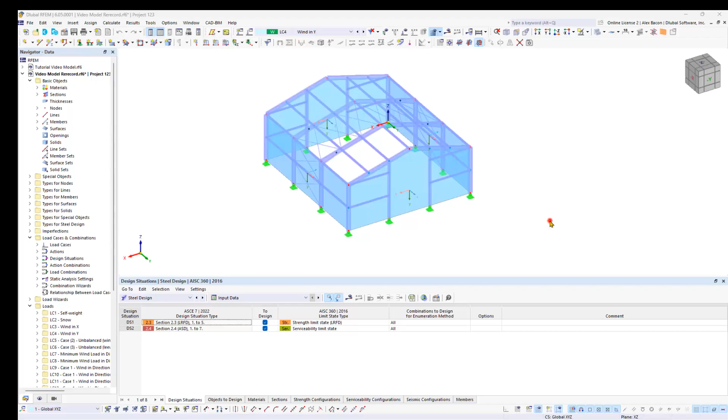This video provides a comprehensive overview of both the design results and intricate design details. Let's start off with running the design results by selecting the Show Results button. My results were already run, so no need to recalculate them.

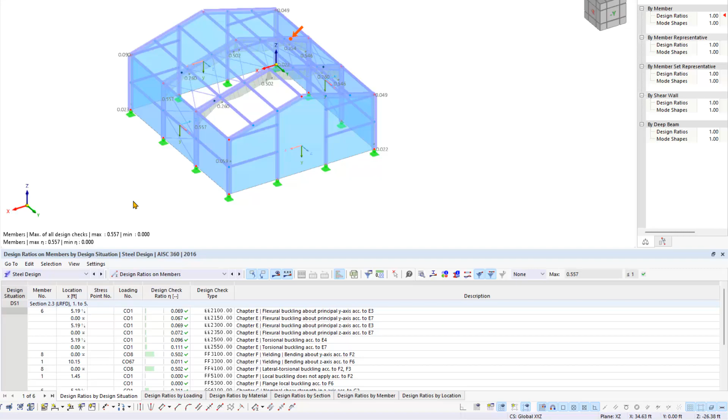Next, let's dive right in and navigate through the results panel to select the steel design from the list. I don't have any other results, so this is already selected. If you do have the static analysis results, this will be ungrayed and you can select steel design from this list.

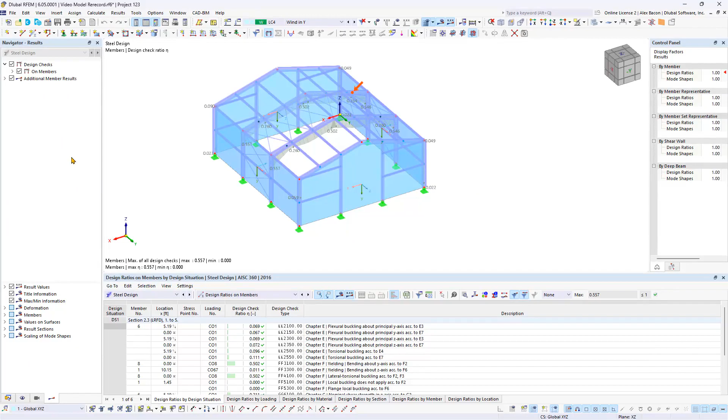The results navigator is presented in a tree structure, which conveniently displays all available steel design outcomes, allowing for a graphical representation on the model upon selection. Each distinct color signifies a specific design type, and the capability to showcase multiple results simultaneously is also at your disposal. Additionally, you can see designs here that have been calculated and then can be chosen accordingly.

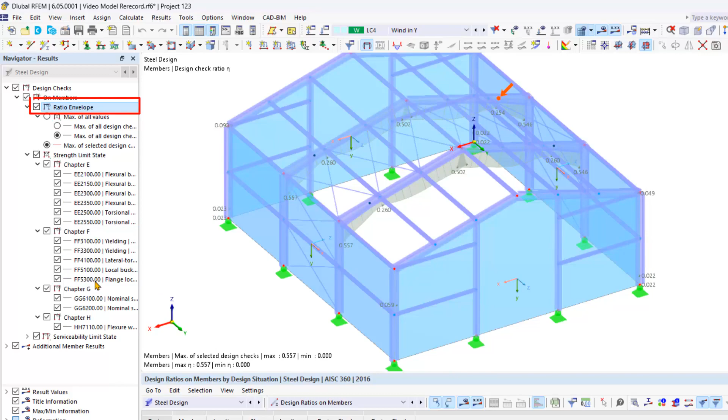If you have the ratio envelope checked, it will only show the maximum of all design checks or the maximum of all design checks without errors. If you have ratio envelope unchecked, then each of these that are checked here under the strength limit or serviceability limit will be shown. Then you can see down here, additional member results for mode shapes have also been calculated.

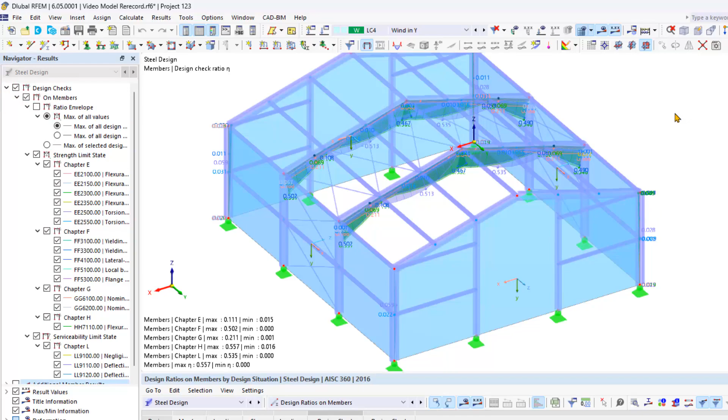Moving beyond the graphical representation, RFEM offers detailed results in tabular form. If you have any warnings, non-designable situations, etc., then there will be an overview subcategory that is shown here where you can easily locate these. We can skip those details for now and focus on the design ratios under the members subcategory.

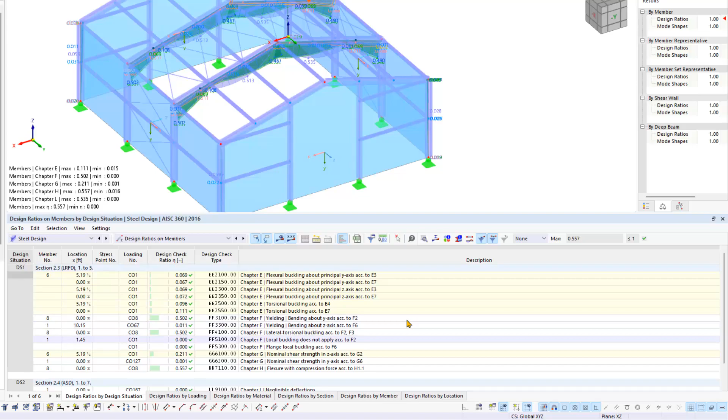Here, the design ratios for all load combinations in each individual member are represented. To enhance the clarity, we can streamline the table by applying filters by clicking on the Show Result Table Manager. A new dialog box allows us to selectively display governing ratios for the desired design situations by deactivating any unavailable ones.

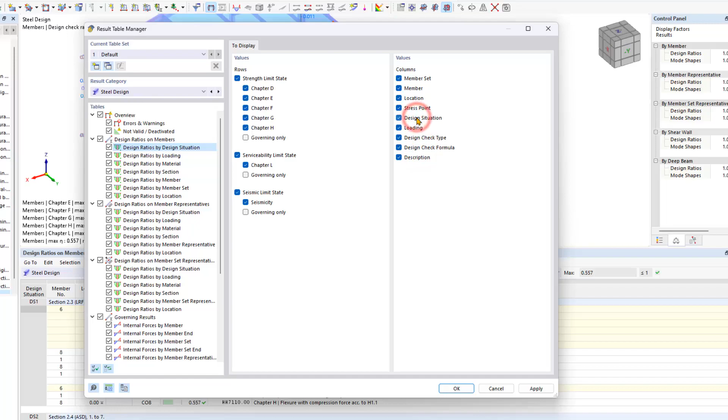Another groundbreaking feature in RFEM 6 is the introduction of detailed design check formulas accessible within the tables. You can simply double-click to open the respective design window. And this is where you can choose the desired design situation and load combination. The design data is presented in the center while design check formulas are displayed on the right. Printing these formulas is also possible with a click of the respective button down here.

It's important to note that these dialog boxes are non-modal windows, allowing flexibility in selecting any member on the structural model at any time within the dialog box by adjusting the data on the left here automatically.

While this tutorial doesn't dive into the intricacies of the design, the next video in this series will demonstrate how to import and save previous data and results in the printout report.